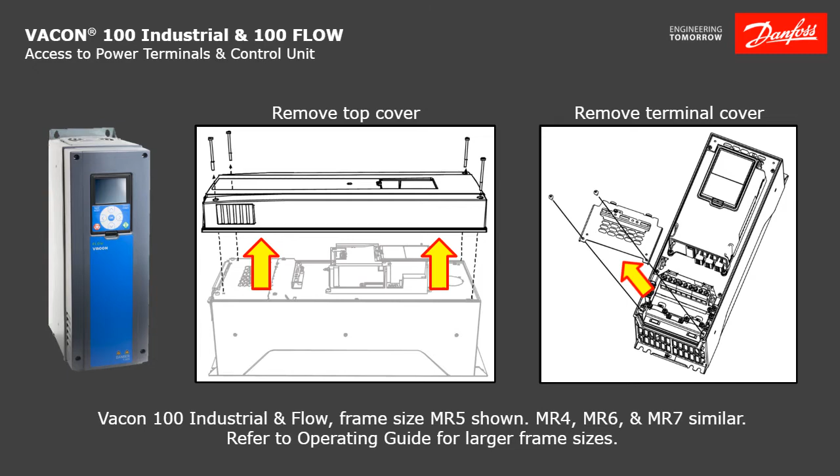To access the control unit on the VACON 100 Industrial and 100 Flow drives, release the 4 screws and remove the top cover. Remove the power terminal cover for access to the mains, motor, brake chopper, and DC bus terminals. The drive shown here is a frame size MR5, but access is similar through frame size MR7. Refer to the Operating Guide for additional information and instructions for larger frame drives. I will discuss accessing these areas on the VACON 100X later in this video.

The drive shown here is a frame size MR5. Drives through frame size MR7 are very similar, and access to the control unit terminals is the same. All VACON 100 Industrial and 100 Flow frame sizes use the same control unit. To reveal the terminals and dip switches, squeeze the tabs on the control box as shown and pull up on the hinged cover. With the control box cover raised, the input-output or I/O and relay terminal blocks are accessible.

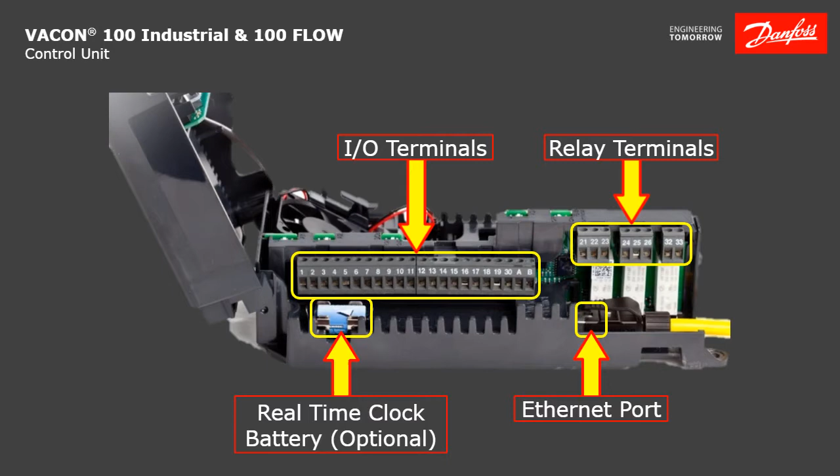In addition to the I/O terminals, the optional battery for the real-time clock is located within this control box, as well as the Ethernet port. There are 5 option card slots on the VACON 100 Industrial and 100 Flow drives. The A and B slots contain the basic I/O and relay terminals, and it's a single card that plugs into both slots.

The most common card in these 2 slots, which is known as the F3 card, has 3 output relays, but there is another option card similar to this one, known as the F4 card, that contains 2 output relays and a thermistor input. The card placed in the A and B slots may vary depending upon the original order specifications.

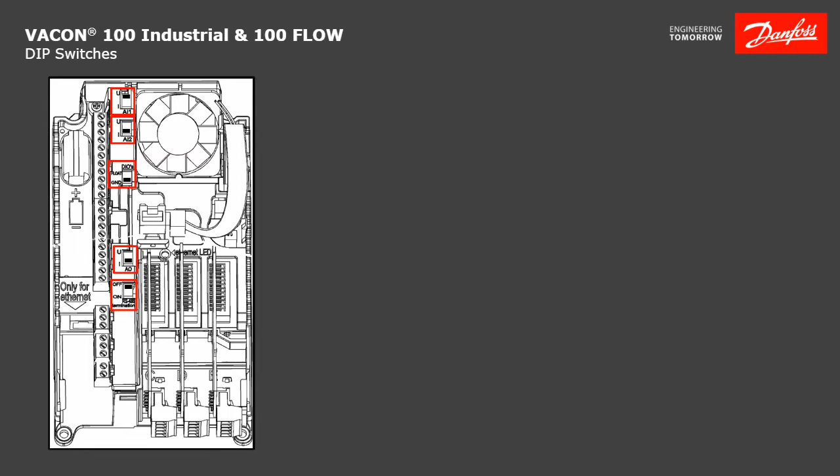There are 5 dip switches to configure the analog and digital inputs and outputs and RS-485 communications. These are located on the top of the standard I/O card plugged into slots A and B of the control unit as shown. Starting at the top, the first 2 dip switches define the analog input 1 and 2 signals for either a voltage or current input. The default for AI1 is in the up or U position, which would be a 0 to 10 volt DC input. The default for AI2 is in the down or I position, which would be a 0 or 4 to 20 milliamp input.

The third dip switch will define the type of digital input polarity to be used in the drive. The default configuration is in the down or GND position. In this position, all of the digital inputs will have a positive logic. This means that applying 24 volts to any of the digital inputs will activate it or turn it on. This is the most common configuration, but if changed to the up or float position, it allows a negative logic for the digital inputs. This means that applying a ground signal to any digital input will activate it or turn it on.

The fourth dip switch defines the analog output signal for either a voltage or current output. The default is in the down or I position, which will be a 0 to 20 milliamp output. If placed in the up or U position, it would have a 0 to 10 volt DC output. The bottom dip switch is used to add a termination resistor when using RS-485 communications. The default position is in the up position, which is off. If needed, the switch can be placed in the down or on position when the termination resistor is required.

The VACON 100 series of drives are built with a standard of 6 digital inputs, 2 analog inputs, 1 analog output, either 3 relay outputs or 2 relay outputs and a thermistor input, an Ethernet communication port, and an RS-485 communications interface. Functionality can be increased by adding an additional option card for I/O or field bus expansion as previously discussed.

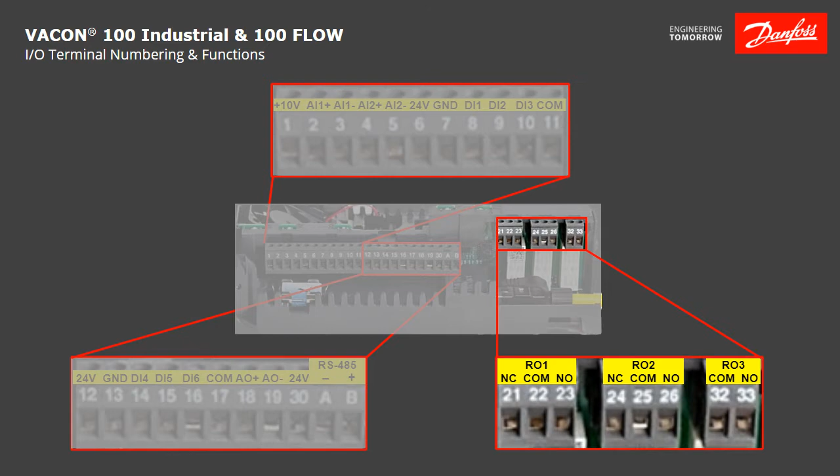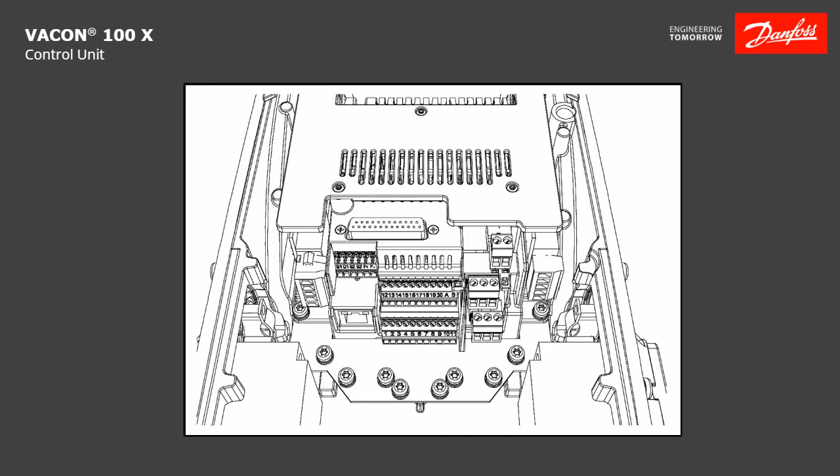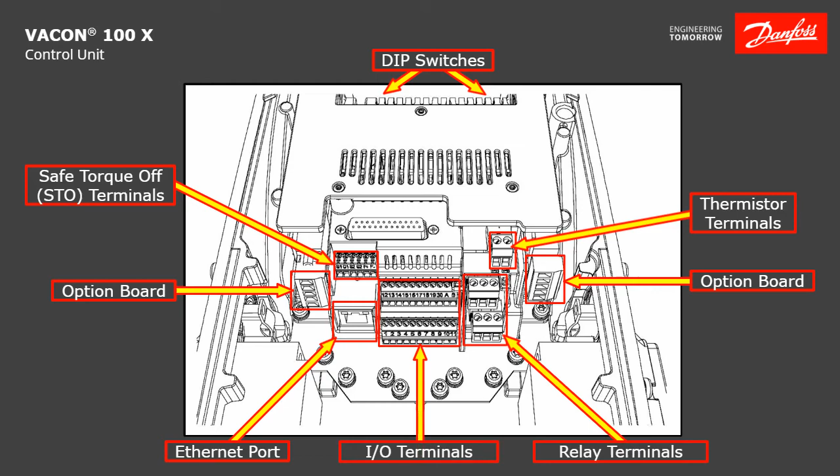Starting in the lower left corner is the Ethernet port. To the left of it is the first of 2 option card slots available on the 100X drives. Above that are the safe torque off terminals, or STO. At the top is the location of the dip switches, which we'll discuss shortly. On the right side we have 2 thermistor input terminals. Below that is the second option card slot. On the bottom right are the 2 standard relay output terminal blocks. Finally, in the bottom center are the I/O terminals and RS-485 field bus communication terminals.

There are 5 dip switches to configure the analog and digital inputs and outputs and RS-485 communications. These are located at the top of the control unit. Starting from the left, the first 2 dip switches define the analog input 1 and 2 signals for either voltage or current input. The default for AI1 is in the down or V position, which would be a 0 to 10 volt DC input. The default for AI2 is in the up or C position, which would be a 0 or 4 to 20 milliamp input.

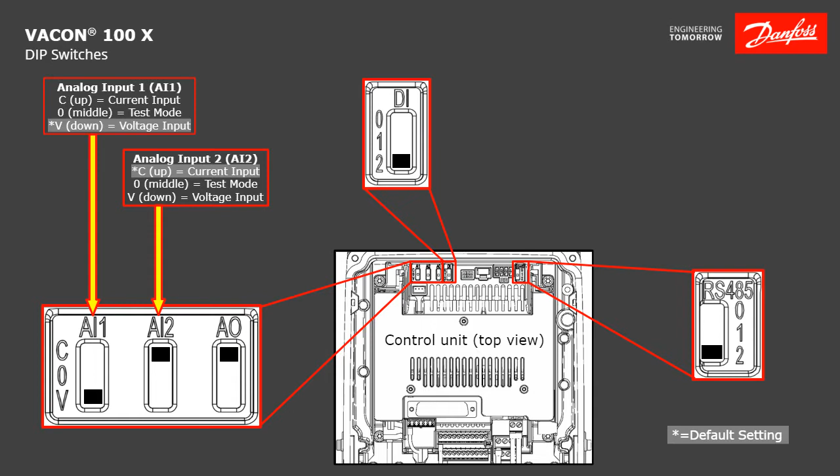The third dip switch defines the analog output signal for either a voltage or current output. The default is in the up or C position, which would be a 0 to 20 milliamp output. If placed in the down or V position, it would have a 0 to 10 volt DC output. Note that analog input 1, analog input 2, and analog output dip switches have a middle or 0 position. This is a factory test mode that should not be selected and may have undesirable results if used.

The fourth dip switch will define the type of digital input polarity to be used in the drive. The default configuration is in the down or 2 position. In this position, all of the digital inputs will have a positive logic. This means that applying 24 volts to any digital input will activate it or turn it on. This is the most common configuration, but if changed to the middle or 1 position, it allows a negative logic for the digital inputs. This means that applying a ground signal to any digital input will activate it or turn it on. The up or 0 position will be used if the digital inputs are to be isolated from ground.

The fifth dip switch is used to add a termination resistor when using RS-485 communications. The default position is in the down or 2 position, which is off. If needed, the switch can be placed in the up or 0 position when the termination resistor is required. The middle or 1 position is used for biasing purposes and connects pull-up and pull-down resistors of 10 kiloohms.

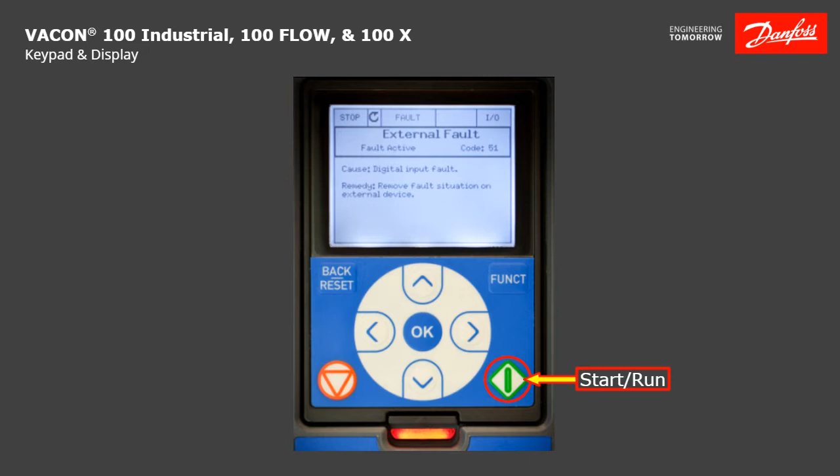Pressing the lower left red button will initiate a motor stop command. The default operation of this button allows it to provide a stop command regardless of the control place, meaning it will stop the motor if being controlled from the keypad, I/O terminals, or field bus. This can be changed to function only in keypad mode from the parameter menu if needed.

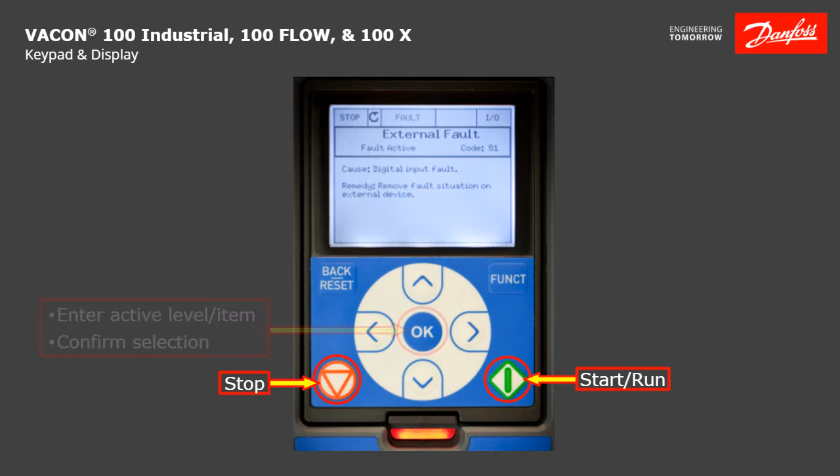The OK button can be used to enter an active menu level or item, or confirm a selection such as when editing a parameter value. The back reset button allows a backward move in the menu, exiting the edit mode, or resetting a fault. The FUNCT or function button is used to access the control page.

The control page can be used to change between the local and remote control places, change the motor rotation direction, or to select the quick edit function that will allow entering a specific parameter or monitoring ID number and directly access that value for editing or viewing.

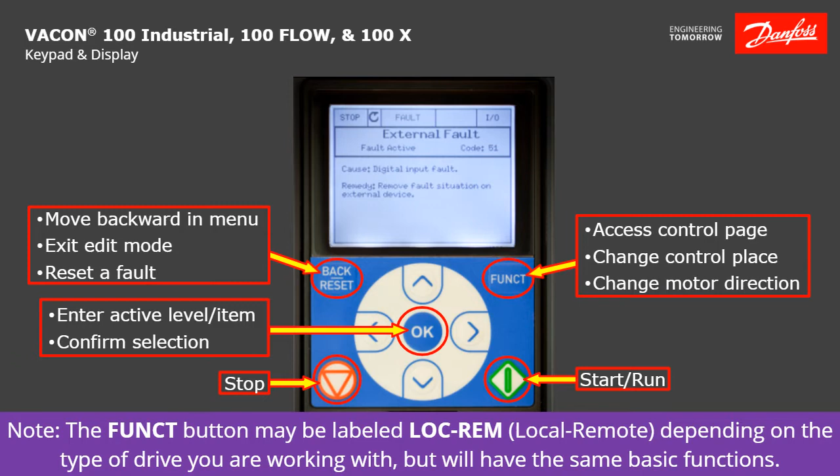The left and right arrows allow moving the cursor left or right when editing a parameter value. This allows editing a specific digit to make programming faster and easier. The up and down arrows allow scrolling up and down through the menu items, or can be used to increase or decrease a value.

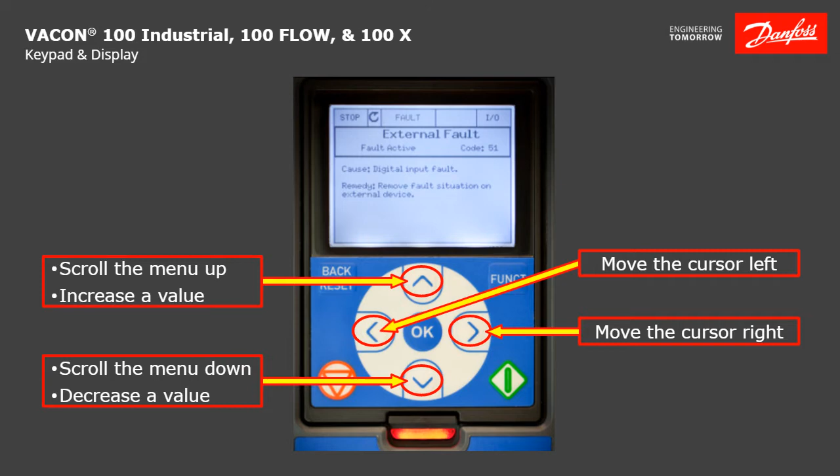The VACON 100 industrial and 100 flow drives contain an LED indicator located directly below the keypad for additional indication of the status of the drive. A slowly blinking green LED indicates that the drive is in a ready state and all conditions have been met for the drive to run. A solid green LED indicates that the drive is currently running, and a quickly blinking green LED indicates that a software update is being processed.

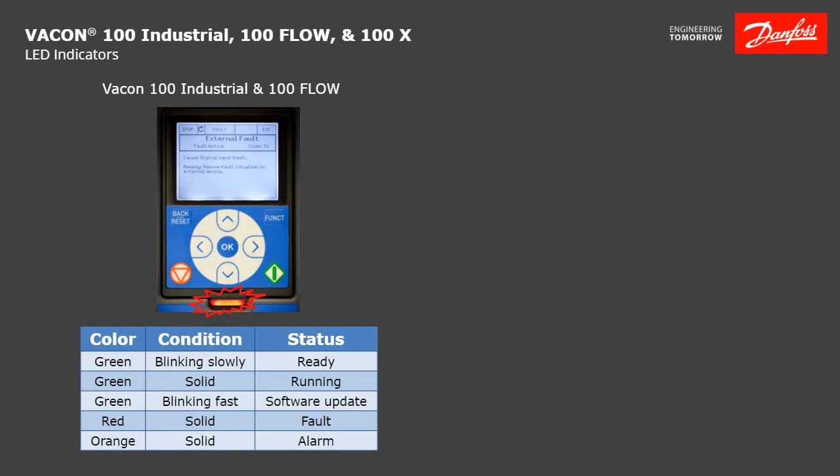A solid red LED indicates that a fault condition has been tripped and the drive is stopped. A solid orange LED indicates that an alarm condition has been met, but the drive is able to continue running until a fault level has been reached.

The VACON 100X contains 4 LED indicators in the lower left corner of the drive. The yellow PWR LED indicates that the drive is powered up. The green Run LED indicates that the drive is currently running. The red FLT LED indicates that a fault condition has been tripped and the drive is stopped. The yellow RDY LED indicates the drive is in a ready state and all conditions have been met for the drive to run.

The LCD display is used to indicate the status of the drive and how it is being controlled, viewing or editing parameter menus and values, and monitoring of various drive input and output values. The graphical display keypad shown here is the most common type of keypad, but there is a text display keypad available. Refer to the appropriate operating guide for detailed information on usage and explanation for the type of display you are using. Operating guides are available at danfossdrives.com. The following information applies to the graphical display keypad shown.

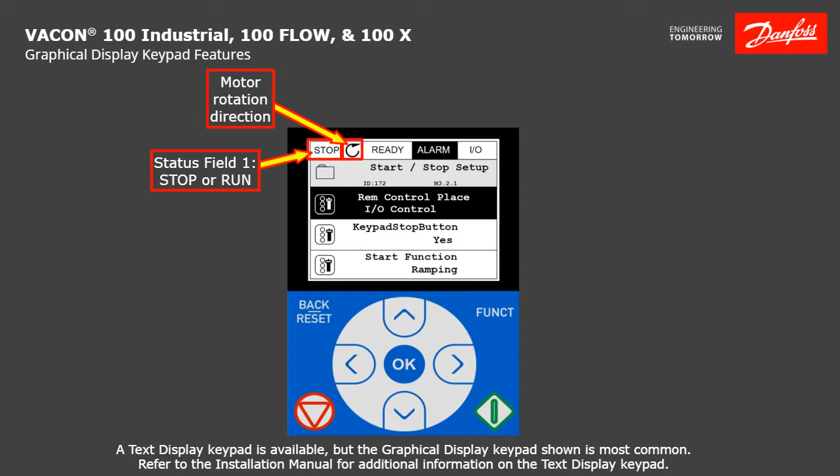Starting from the top left, the first item is status field 1, which indicates if the drive is in a run or stop state. The next block indicates the motor rotation, either clockwise or counterclockwise. The next item is status field 2, which indicates if the drive is ready, not ready, or a fault has been detected. Next is the alarm indicator, which will indicate if an alarm level has been reached.

The top right block indicates where the drive is being controlled. This will show PC if being controlled from a computer, I/O if being controlled remotely from the I/O terminals, keypad if being controlled locally from the keypad, or field bus if being controlled remotely through field bus communications.

The next line down provides text to indicate the menu category level currently being accessed. Below that is the location field. This provides the ID number of the parameter or value and the current location within the menu structure. The fields below that are the groups or items associated with the menu category listed. The dark colored block is the activated group or item.

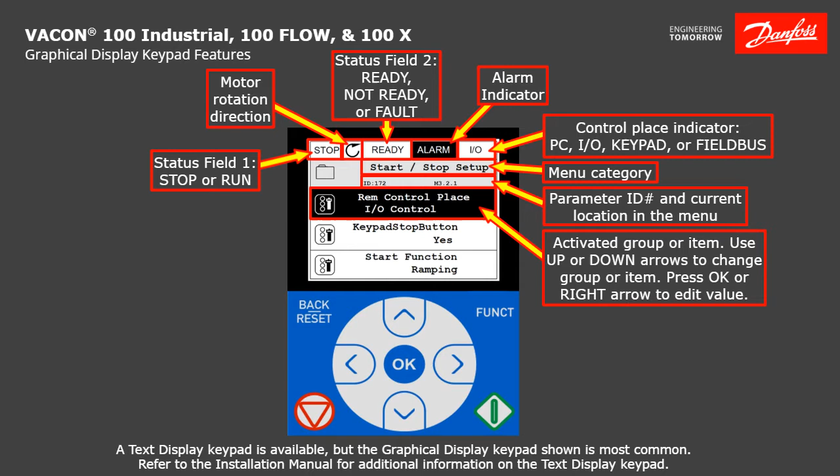Using the up or down arrow buttons will allow scrolling to the desired block. Pressing the OK or using the right arrow will allow viewing or editing the selected item or allow you to continue further into the menu group depending on the current location in the menu structure.

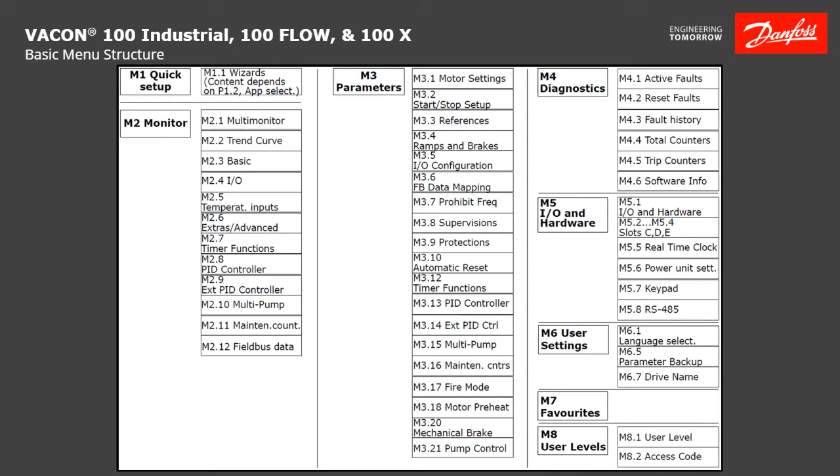Here is the basic menu structure for the VACON 100 series of drives. Note that this menu structure may vary slightly depending on the type of VACON 100 drive you're using, but the majority of this structure applies to the entire VACON 100 series of drives. I will discuss some of the most common basic menu items when I show the operating portion of this video.

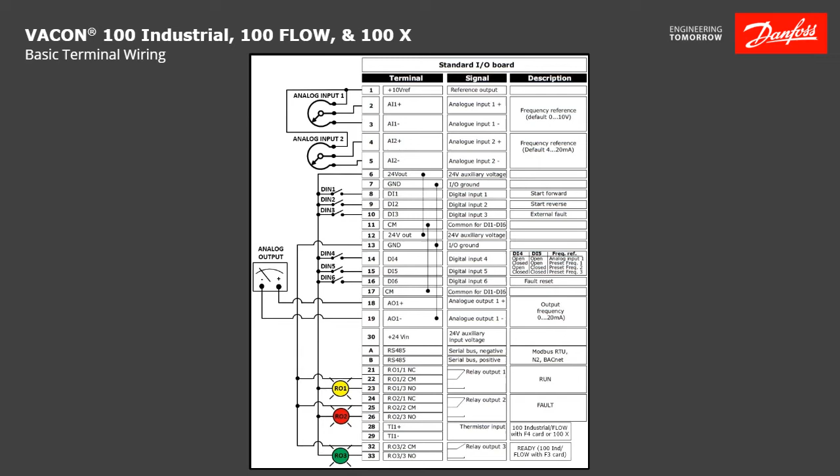Terminal number 18 is the analog output plus, and terminal number 19 is the analog output common, which is internally connected to ground, both of which are connected to a meter for indicating the output frequency. Terminal numbers 23, 26, and 33 are the normally open relay contacts for RO1, 2, and 3, with the default functions also listed. Now I'm going to perform a demonstration on an actual drive here.

So I've powered up the drive, and when I powered it up, it came up to this main menu, and from the main menu we have access to all of the other parameters and values that we can either edit or view. What I want to do is bring this drive back to factory default settings. So to do that on this drive, from the main menu, I'm going to scroll down using the up and down arrows until we get to user settings.

One of the features with this drive is there's a number in parentheses underneath the item. It tells you how many menu items are within that level. If I hit OK, we come up to the user settings menu, and we've got a number of different items within that menu. And in this case, I want to go to parameter backup. If I hit OK, the first item that's on here is restore factory defaults.

If I hit OK, we can activate it. There's a help menu there. There's also an add to favorites item. If I want to go down and see what restoring factory defaults means, I can hit OK, and it says restores factory default settings. It also will restart the drive if the motor is not running.

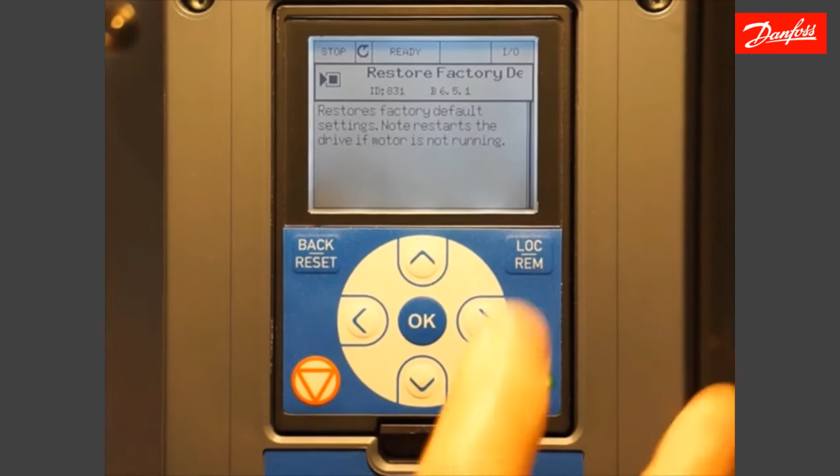OK, we go back and we're back to restore factory defaults. Hit OK again. Here I hit activate. Now all the parameters are being reset back to factory defaults. When this finally powers back up, the menu will be at a quick startup level, and we can change some of the various information right here at the beginning. This is also the screen that you should see if you're setting up a new drive.

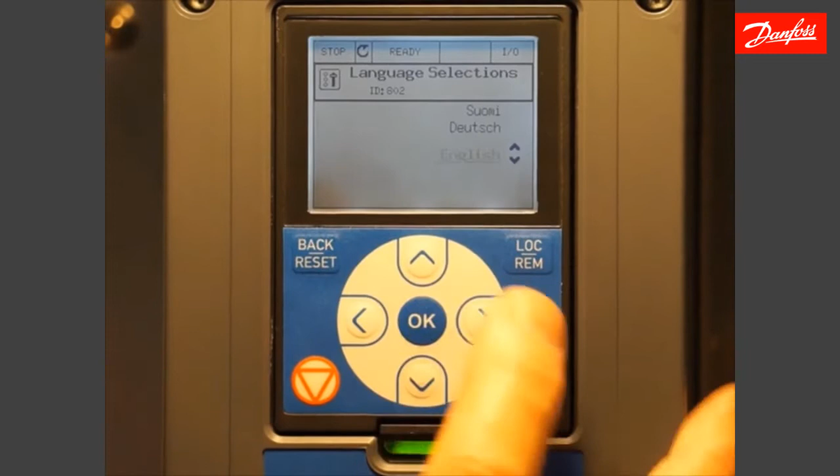So the first item here is our language selection. I'm going to choose English. If this had a battery for the real time clock, which this one does not, then it would ask for items such as the date, the time, daylight savings, those types of things. The next thing after that is the startup wizard. I'm going to say yes to the startup wizard.

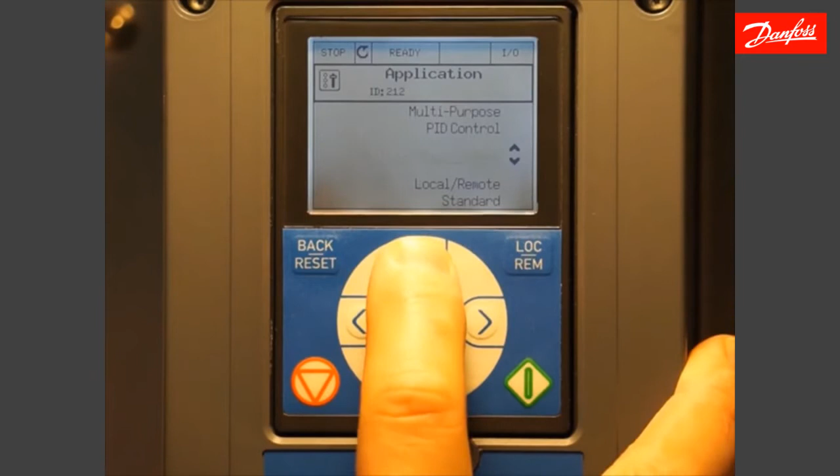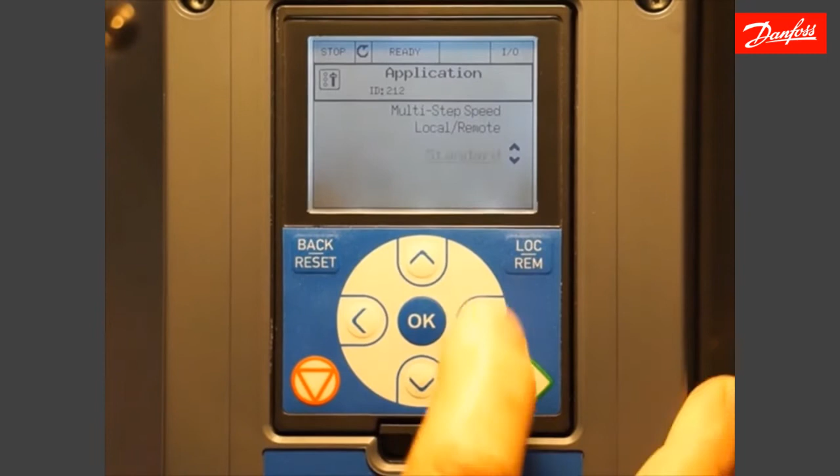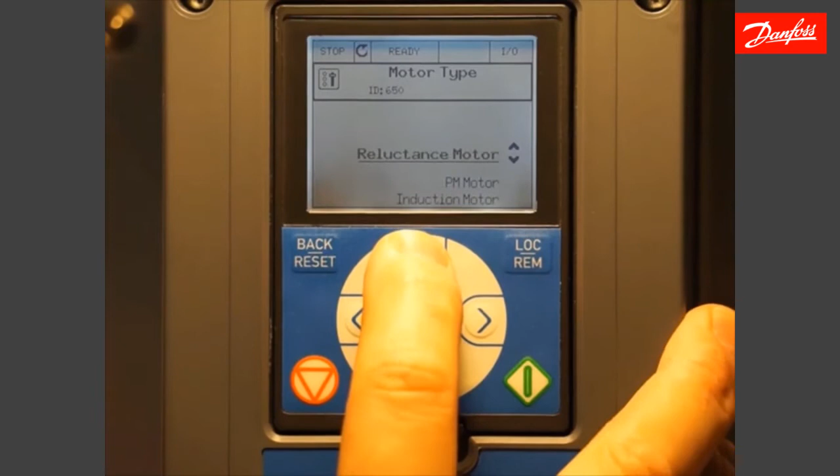And here we can choose which application we want to load into this drive. So we have a choice of standard, local remote, multi-step speed, PID control, multi-purpose, or motor potentiometer applications. I'm going to go with the standard application. So I hit OK. The next question is, what type of motor do you have? Is it an induction motor, permanent magnet, reluctance motor? The one I have hooked up is an induction motor, so I hit OK.

The next thing it asks for is the motor nominal voltage. This would be off of the motor nameplate. So in this case, it is a 230 volt motor. What is your nominal frequency based on the nameplate setting? It is 60 Hertz. What is my motor nominal speed? I'm going to change that to the motor nameplate setting, which in this case is 1600 RPM.

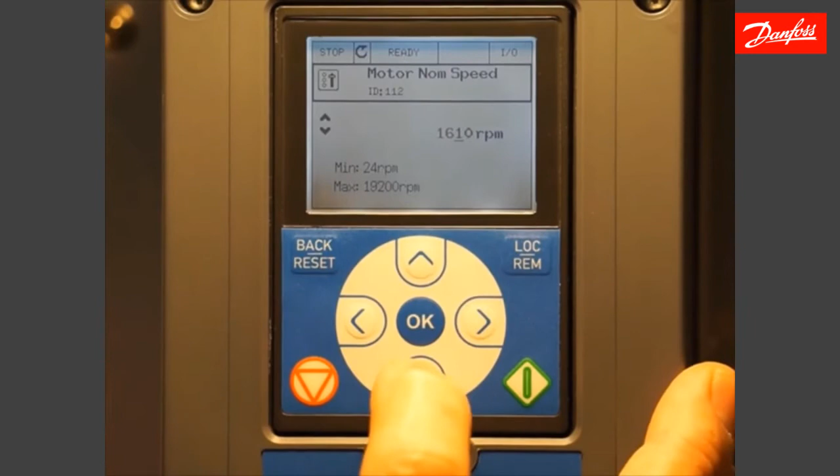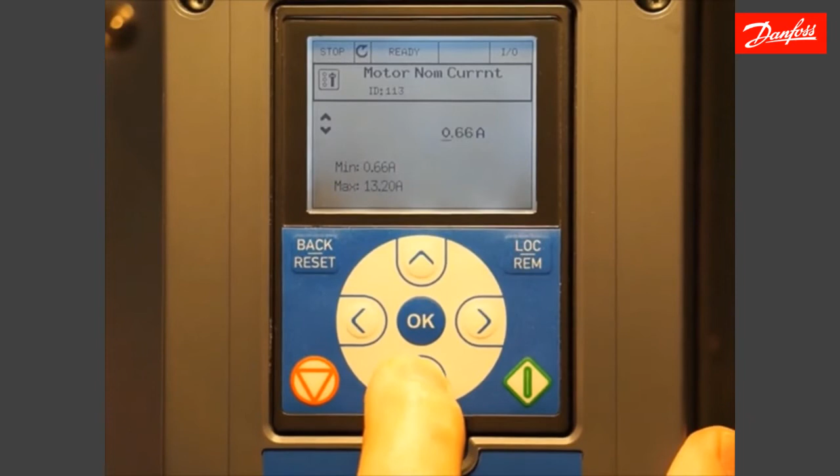And you see I can use the left and the right arrows to select specific digits. If I hit OK, I go on to the next one. My motor nominal current, in this case it's a very low current motor, so I'm going to bring this down to the minimum level. The minimum for this drive is 0.66 amps. I hit OK. Motor cosine of phi, again off of the motor nameplate. 0.80 is OK for this motor.

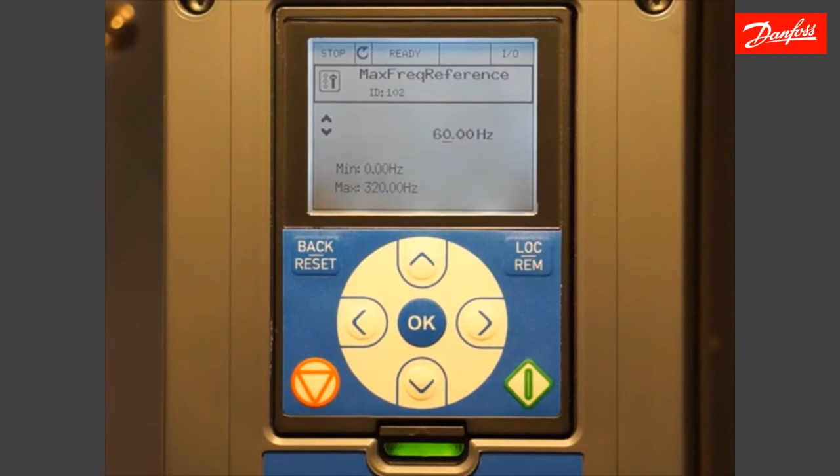Now what is my minimum reference speed? What is the minimum speed that I want this motor to run at? And I'm going to leave it at 0 Hertz. My maximum reference defaults to 60 Hertz. I can set that higher than 60 Hertz. I can set it lower than 60 Hertz. I'm going to change this to 62 Hertz.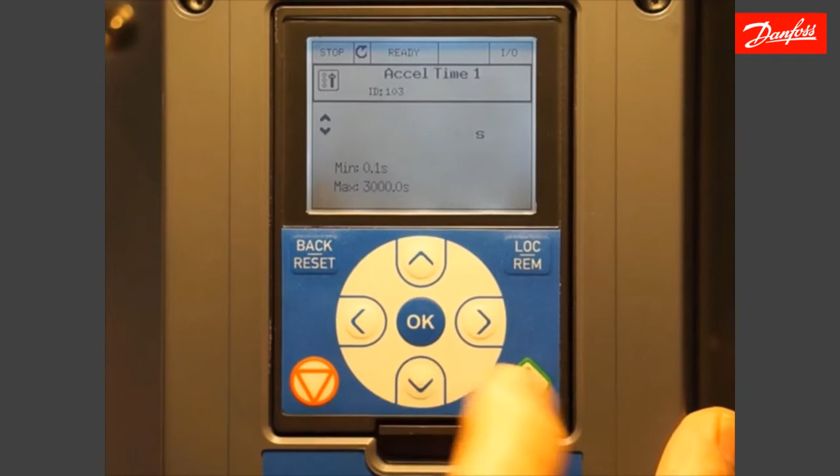Okay. Acceleration time. How fast do you want this to get up to full speed? In this case, I'm going to say 3 seconds. My deceleration time, the time it takes to get from full speed to 0 speed, I'm going to say 3 seconds again.

Application wizard. So again, we're going to go into that. The next question is for selecting from where the start-stop commands and frequency reference is given. Hit OK. And do I want the I/O terminal, field bus, or keypad? In this case, I do want to go with the I/O terminals. Hit OK.

So the message given in I/O terminal control: frequency reference can be given either by AI1, 0 to 10 volts, or AI2, 4 to 20 milliamps. I actually have analog input 2 set as a 0 to 10 volt reference as well. I can scroll down to the next message if there is another message. So this just says press OK to continue or back to cancel.

The next thing that comes up tells you what the current configuration is that you've selected. So analog input 1, which is on terminals 2 and 3, is set for frequency reference. Analog input 2, terminals 4 and 5, frequency reference.

Digital input 1 on terminal 8 starts forward. Digital input 2 is starting in the reverse direction. Digital input 3 will provide an external fault. Again, that's when 24 volts is applied to any one of those terminals. I see I have a scroll bar over here, so I can scroll down.

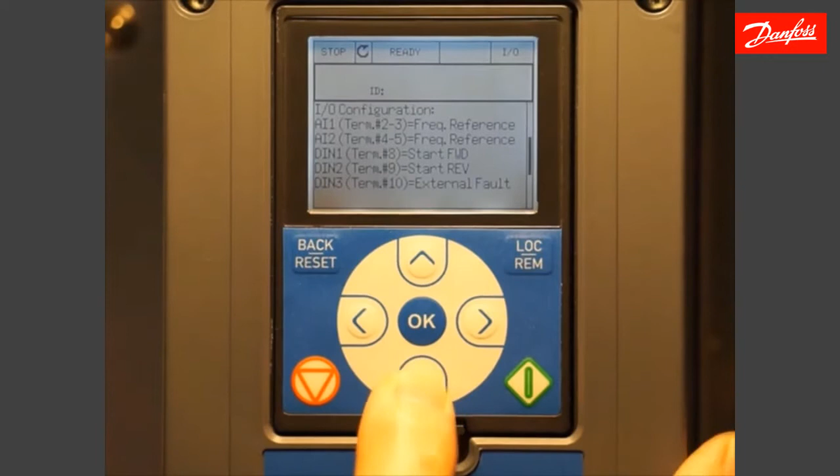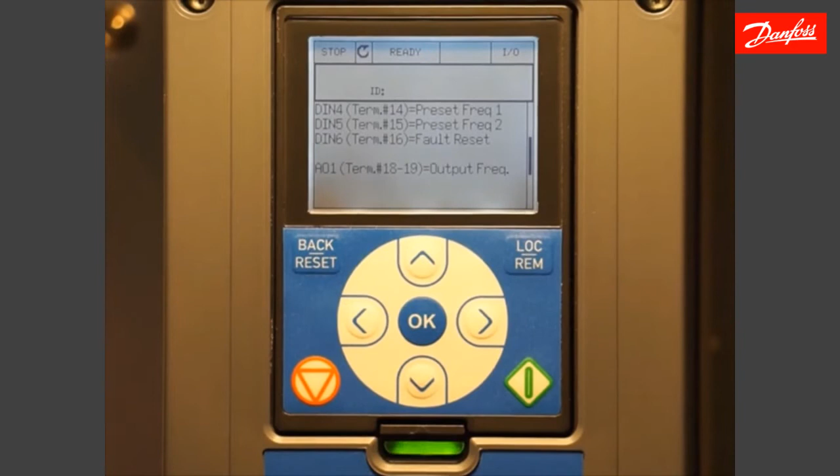We see that digital input 4 on terminal 14 is set for preset frequency 1. Digital input 5 is set for preset frequency 2. And digital input 6 is set for fault reset. Again, these are all digital inputs that are freely programmable for other functions. I'm going to be presenting just the factory default functions.

Also, analog output 1 is set for output frequency. So I have a meter on my I/O simulator with a gauge on it that will show me a proportional reference of the actual output speed. I can scroll down again, and then we'll have our relays, how they're programmed.

So when relay 1 is enabled, it tells you that it's in a run state. Relay 2 is in a fault state, and relay 3 would be in a ready state. Press OK to continue or back to cancel. So I'm going to hit OK. Wizard is ready. Press OK to exit.

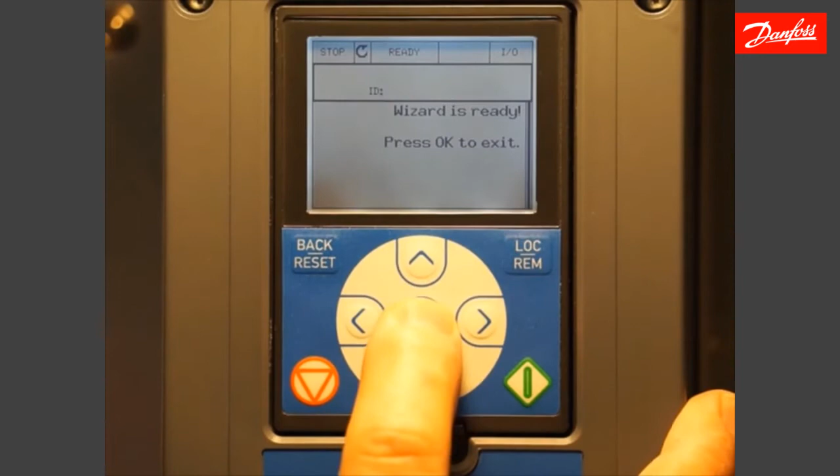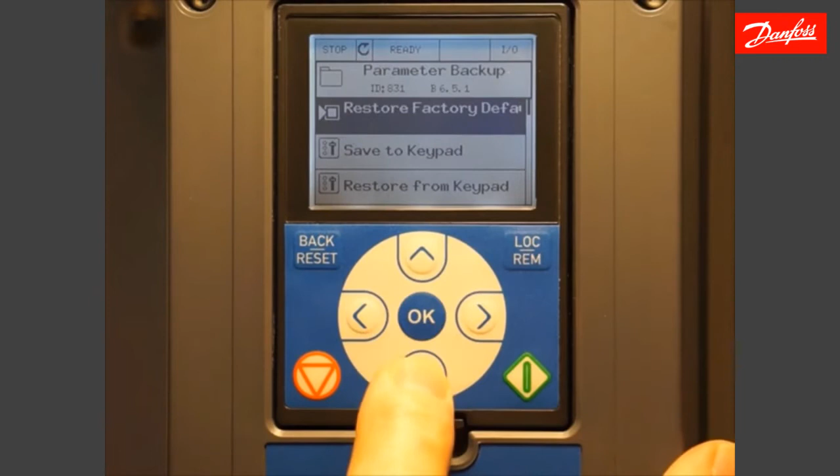Now that we have our basic setup input, the next thing I want to do is save all of these parameters to the keypad. So we're going to go back to the same menu, which was the user settings, parameter backup. We can save it to the keypad, restore it from the keypad. We have 2 sets that we can save it into. We can save it to set 1 or restore from set 1. We can save it to set 2 or restore from set 2.

In this case, I'm just going to save it to the keypad. OK. Again, help if you need some information. Save parameter values to keypad to copy them to another drive. So that's an easy way to save your parameters so that you can input them to various other drives if you'd like to. Hit OK. Save to keypad.

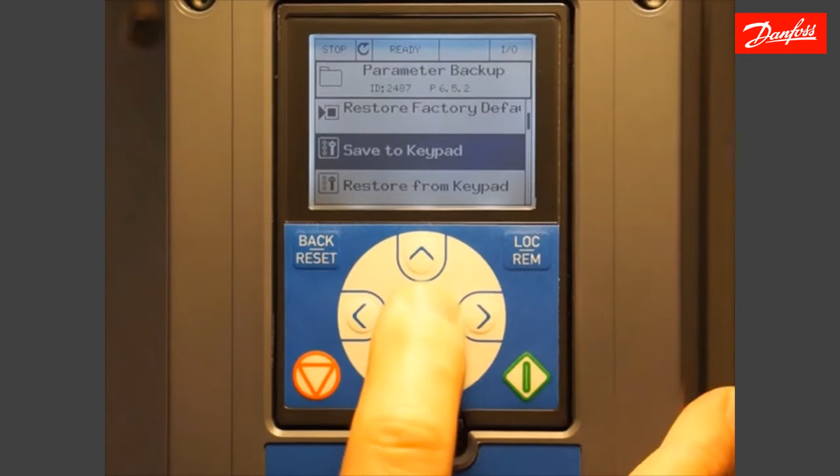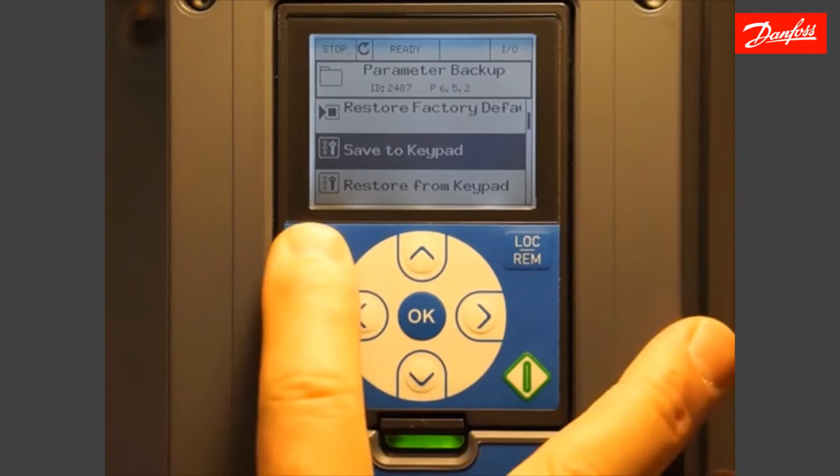Parameters have been saved. Press OK to continue, and we're finished with backing up the parameters to the keypad. So I just hit the back until we get back to the top level of the main menu. Now I want to run this in keypad mode. So right now it shows that we are in I/O mode.

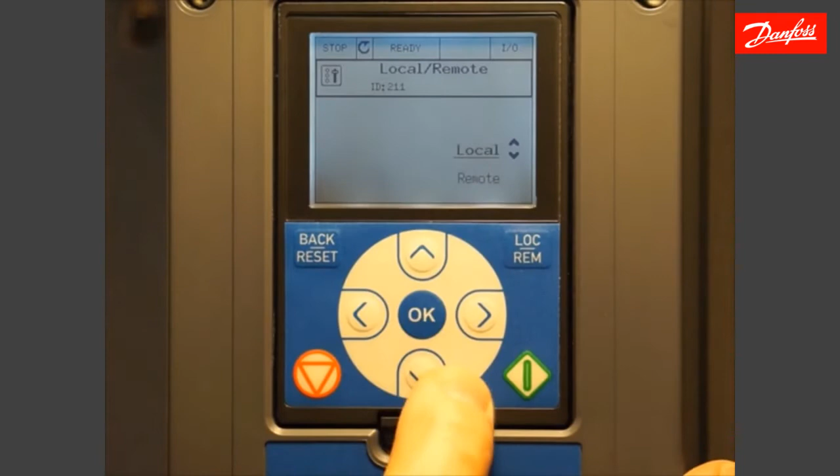In order to change that to keypad mode, I just hit the local remote button and scroll down to the local remote item, hit OK, and here we can decide, do we want it in local or remote, and I want to go local, which would be keypad. And now it brings up the monitor screen here, shows us we're in keypad mode.

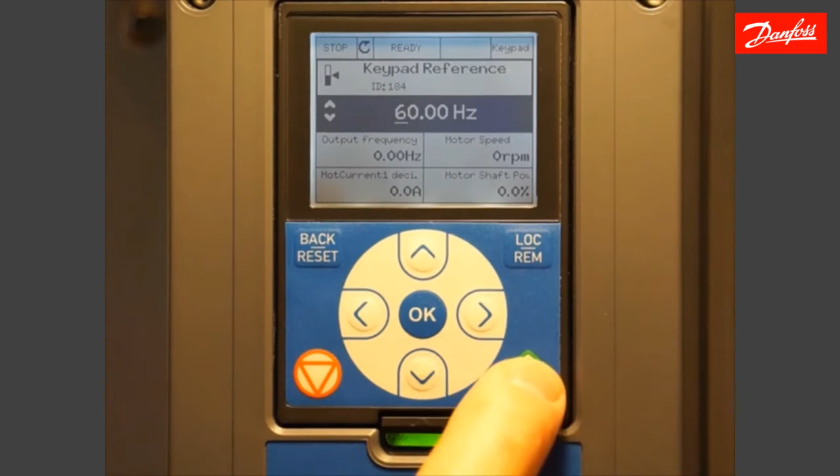Here I can change my keypad reference, hit OK, and I can bring that up to whatever speed I would like it to run at. In this case, I'll say it's 60 Hertz. I hit OK. When I hit the green button, this motor will take 3 seconds, and it should ramp up to full speed of what I have set. We see that output frequency says 60 Hertz.

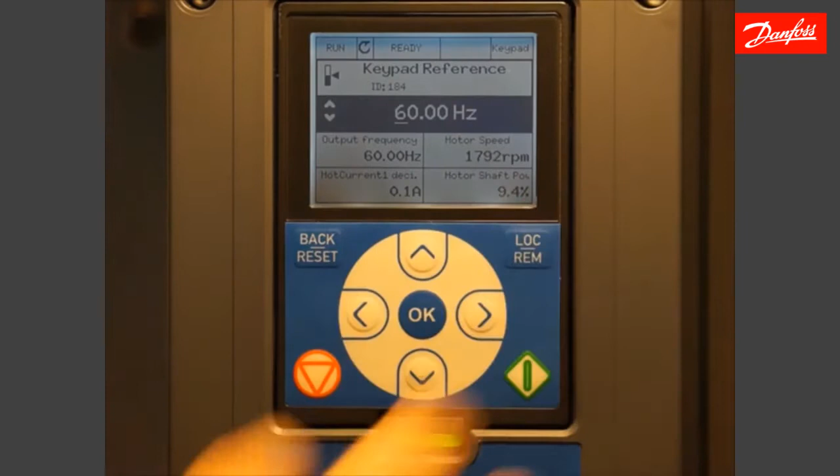My motor speed, approximately 1780 RPM. Motor current, shaft power. These are all editable fields. You can display what you'd like there. That screen is available here when you hit the local remote and go to control page. That's the screen you would see.

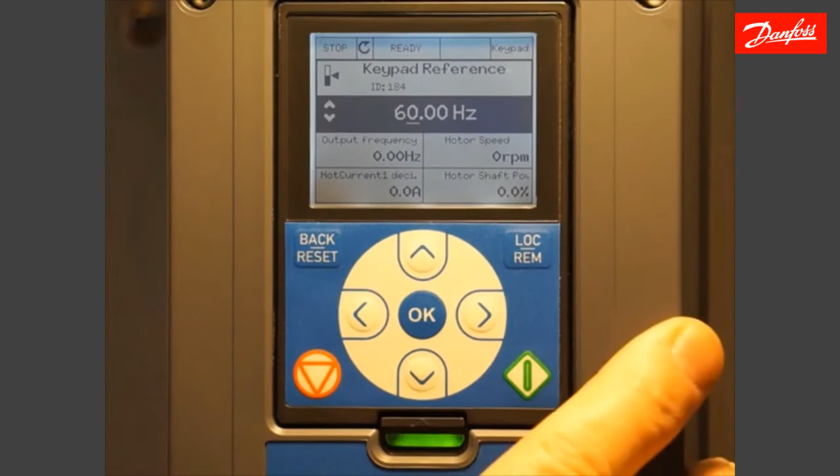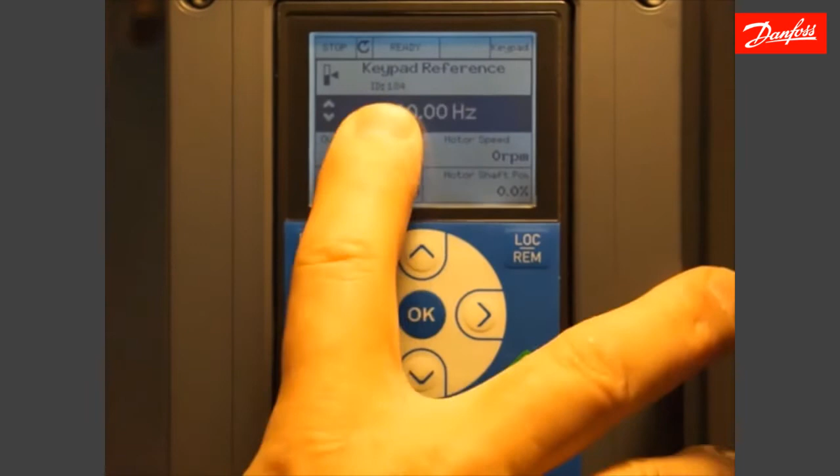I can hit stop, and this will stop the motor. We see that there's no output frequency, speed, or anything else listed here. Again, up here we show stop, we show what the motor rotation was. It is in a ready state right now, running on keypad. We're in keypad reference, which is this ID number 184.

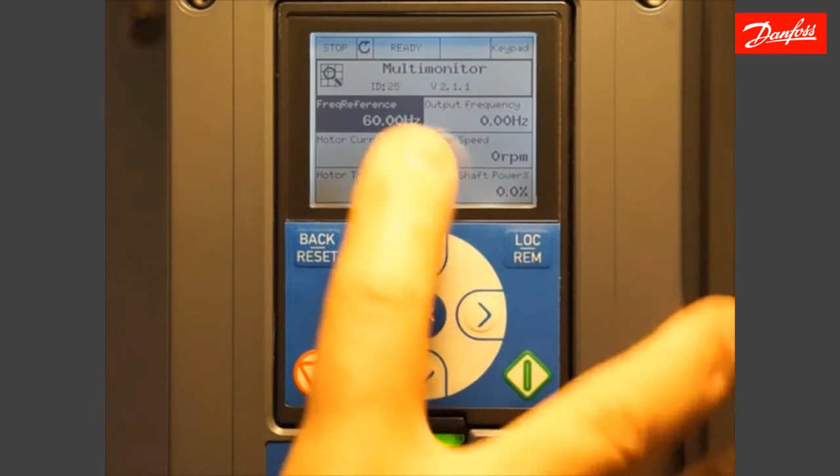We can also go into the monitor mode, which is the next item down. The multi-monitor is very similar to that control page. This also lists a number of different items, all editable for whatever particular item you want to display on that screen. I hit run again. We see the same basic information.

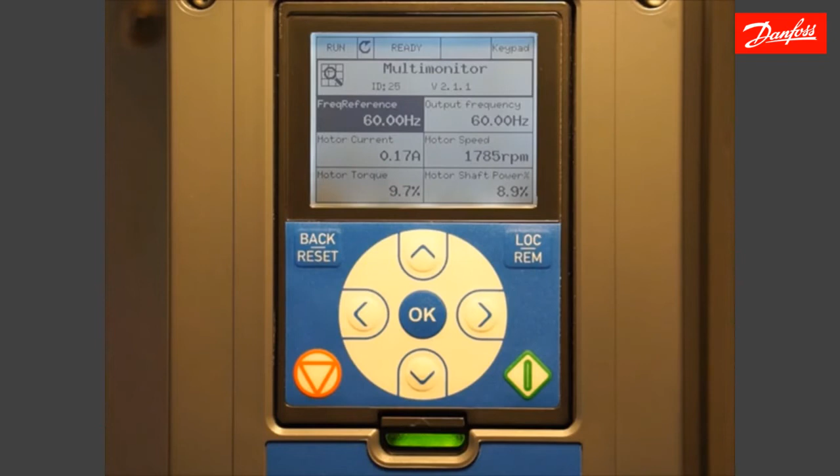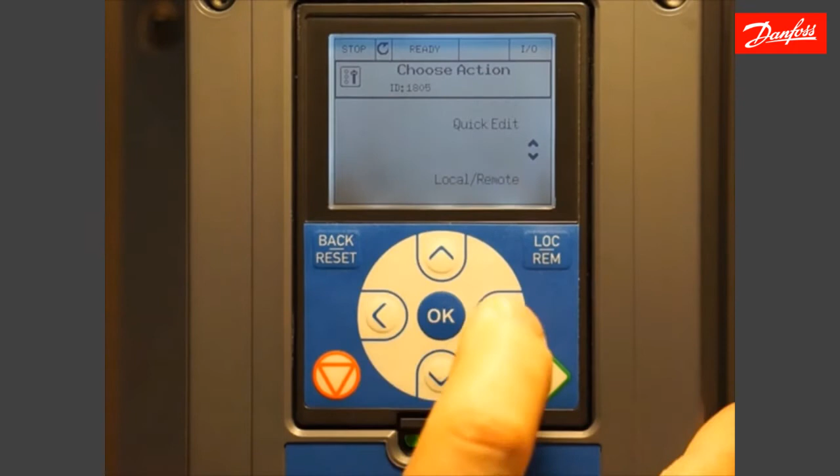Now I want to run this using the I/O terminals. So the first thing I'm going to do here is go back to the local remote and change this from local to remote. And right now it shows that I'm on the I/O terminal strip. And I can also go to that same control page, and we can see the information displayed here based on the I/O, the analog inputs.

So right now I'm bringing these analog inputs the whole way down to 0. If I bring up analog input 1, we can see that there is a change in the frequency reference. Bring that back down to 0. Do the same thing with analog input 2. And we see that it also responds as a frequency reference.

So the drive is not running at this point, but I turn digital input 1 on. Now it shows that it is running. We have a 0 frequency reference, so the motor is not spinning. But if I bring one of the analog inputs up, we can see that it is now running. And I'll bring that up to full speed. We see our output frequency. This was our reference. This is what it's actually running at. There's our RPMs, our current, and shaft power.

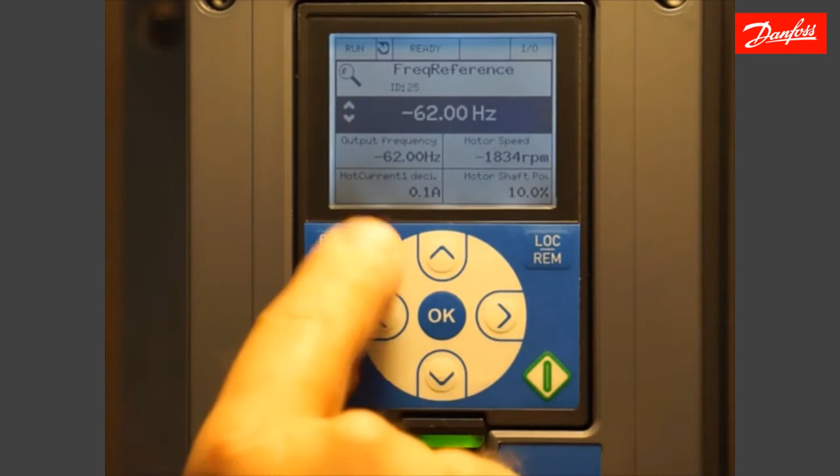I'm going to bring that back down. Turn digital input 1 off. And I'm going to turn digital input 2 on. Digital input 2 is a reverse, and we'll see that it shows a negative reference. So we're running in reverse with a reference of negative 62 Hertz. Output frequency is negative 62. Motor speed is a negative value. And again, same values for our current and shaft power.

I turn digital input 2 off. Turn digital input 1 back on. So right now I have a frequency reference of about 35 Hertz. If I turn digital input 4 on, digital input 4 is a preset reference. The default value is 10 Hertz. I turn that off and turn digital input 5 on. Digital input 5 is a preset speed reference of 15 Hertz. And when I turn 4 and 5 on, we have a preset reference of 20 Hertz. If I turn those back off, we're back to being controlled by the analog inputs.

I can create a fault, external fault in this case. We can see that the keypad display is flashing. We have a fault listed here. We also have a red LED showing here. So I'm going to turn digital input 3 off. Hasn't cleared yet, but I can use digital input 6 as fault reset. And once I do that, we're back to a ready state.

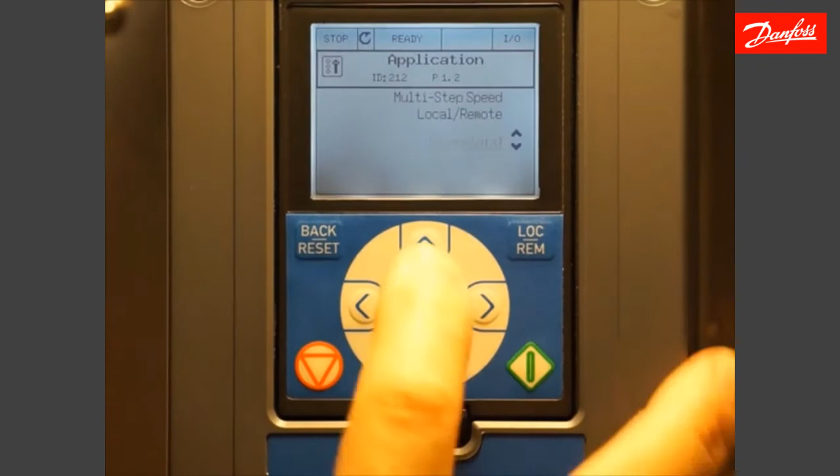A number of these items will be things that we have already set during that startup wizard, such as the application, but it could be changed here. We can change that to whatever, and we have the same options to pick from. I'm going to keep it as standard. There's our minimum frequency reference. We had selected 0 Hertz. Our maximum frequency reference, we had selected 62 Hertz. The acceleration and deceleration time, we had selected 3 seconds.

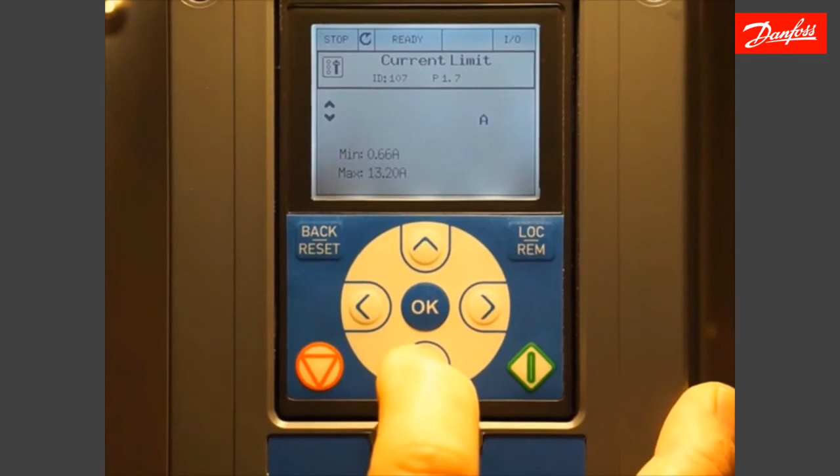Current limit is a new parameter we haven't done yet, and we can go into that if we wanted to change that to something other than 8 amps, which is a default level. In this case, I'm going to change this to 1 amp. Click OK to accept it, and then back. And now you see that the value has been changed. Next item down is the motor type, and we had selected induction motor during that startup wizard. I'm going to leave it as that.

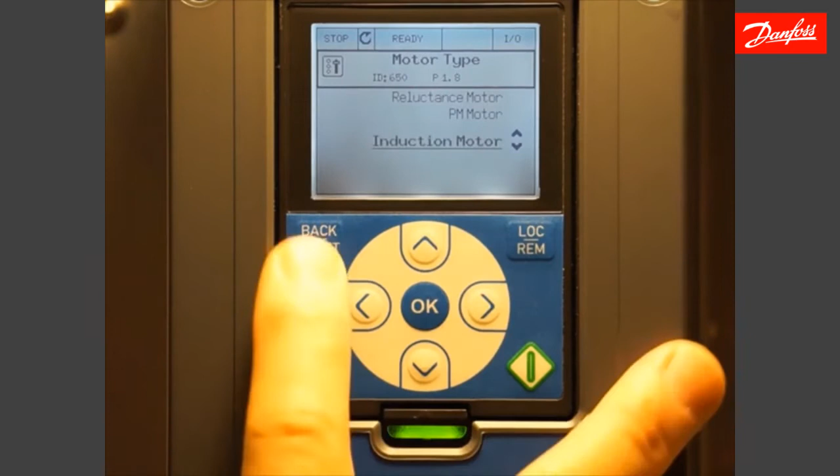The next items will be from the motor nameplate. So we have motor nominal voltage, 230 volts, motor nominal frequency, 60 Hertz, motor nominal speed of 1600 RPM, motor nominal current 0.66 amps, motor cosine of phi 0.80. Energy optimization is disabled. If you wanted to enable that function, you can do that right here.

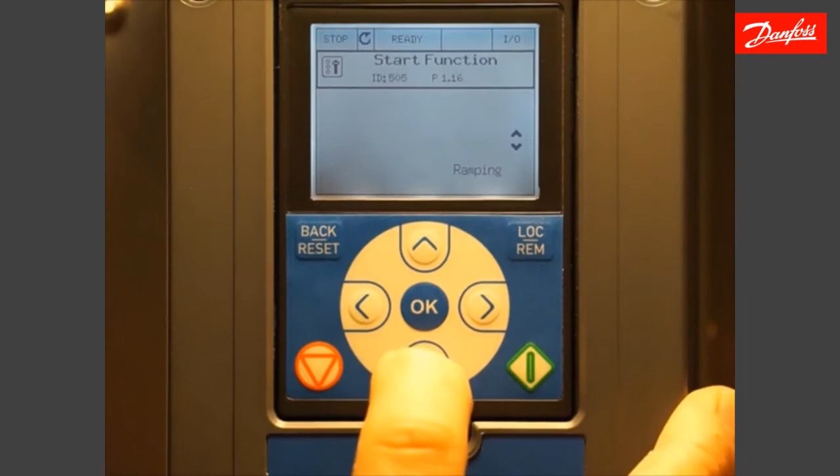Motor identification. The motor identification will fine-tune the drive to match the connected motor and cabling. It provides the drive with a more accurate motor model than just entering the standard data in the parameters. Start function, we can select from ramping or flying start. I'm going to leave it as ramping. Flying start would allow you to start the drive in a motor that is already rotating.

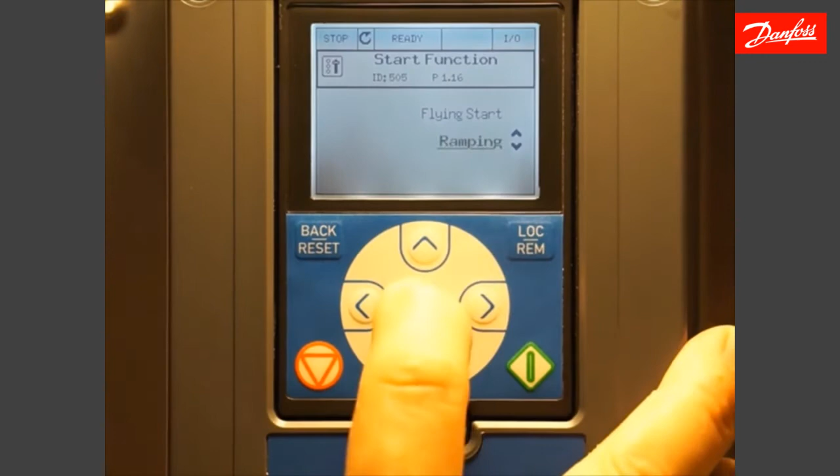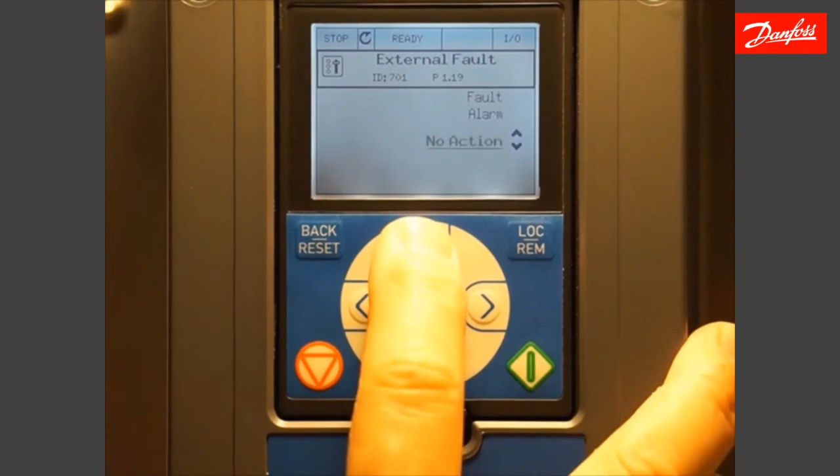Stop function, either coasting or ramping. Coasting is the default, but we could change that to a ramping stop if we wanted. Automatic reset, we can enable or disable, and from defaults this is a disabled feature. External fault, we can decide how we want to deal with an external fault. Default is it faults the drive and it stops it from running. Or we could select fault and coast instead of a ramp. We can give an alarm, or we could do no action. I'm going to leave it as a fault.

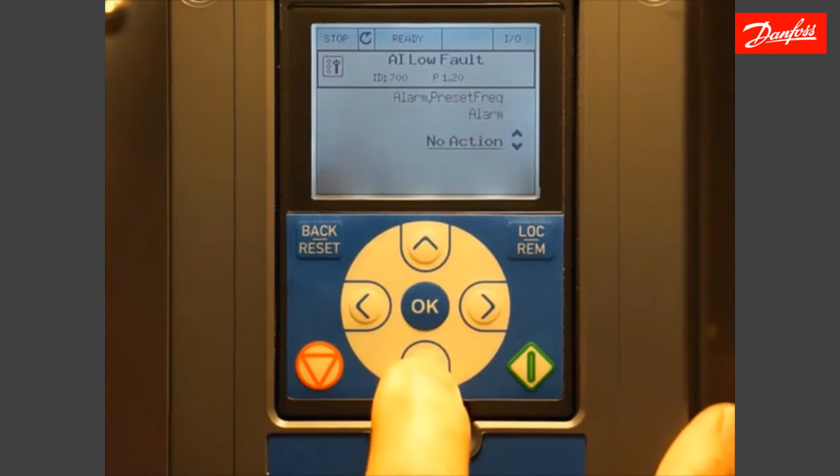Analog input low fault. If there is a fault in the analog input, what would you like the drive to do? And if you're not sure, again, we have this help. Use this parameter to select the response of the drive to an analog input low fault. And we see that we have no action, alarm, alarm preset frequency, alarm previous frequency, fault, fault coast.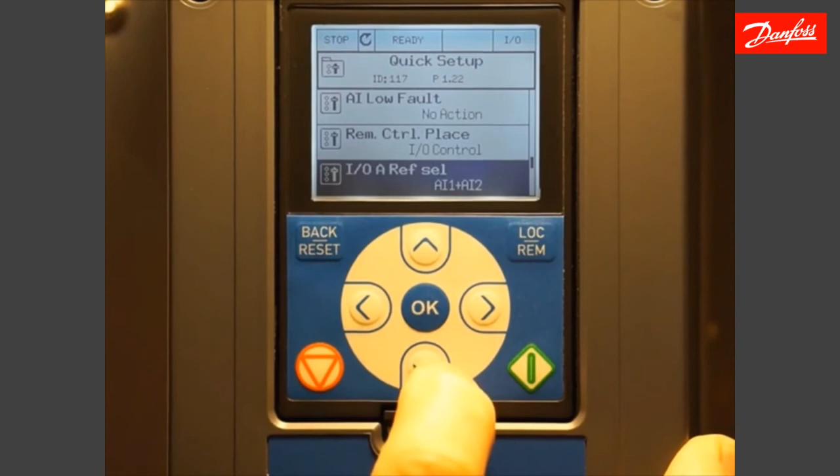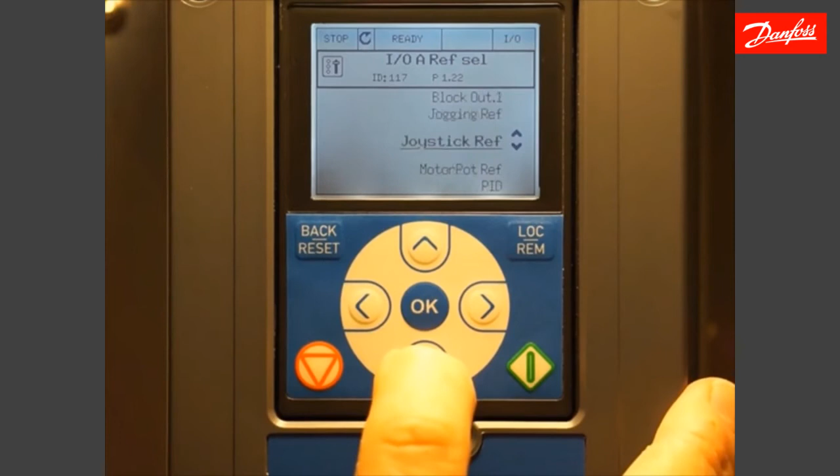The remote control place, which we had set during the startup wizard for I/O control. Reference for the I/O is analog inputs 1 and 2. That can be changed. There are a number of selections here we can select from. I'll leave it as analog input 1 and 2 together. Keypad reference select, I'm going to keep it as keypad reference. Field bus reference select, leave it as field bus.

Analog input 1 signal range. We can change that from a 0 to 10 volt or 0 to 20 milliamp to a 2 to 10 volt or 4 to 20 milliamp if we'd like. Same with analog input 2 signal range. Relay output 1 function. Right now it's set up as a run for defaults. Relay output 2 fault. Relay output 3 ready. Analog output 1 function is for output frequency.

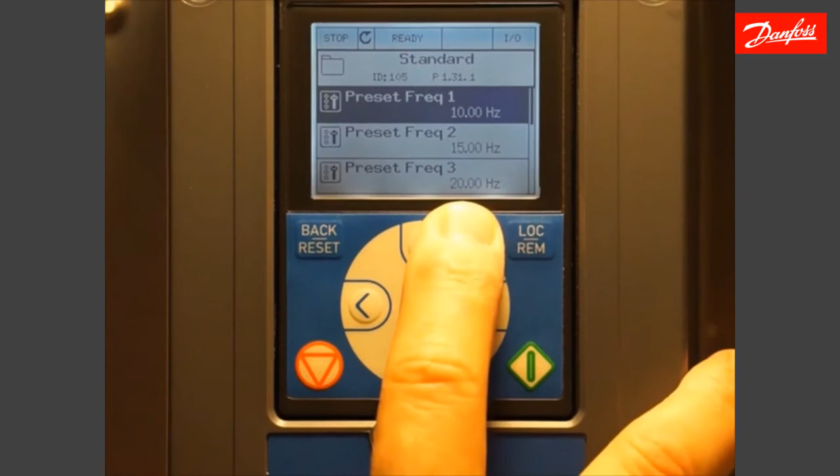Standard, this gives you the ability to change your preset frequency reference levels. So as we see, we have 10 Hertz, 15 Hertz, and 20 Hertz for frequencies 1, 2, and 3, which is when we enabled digital inputs 4 and 5. And then we're back to the beginning again.

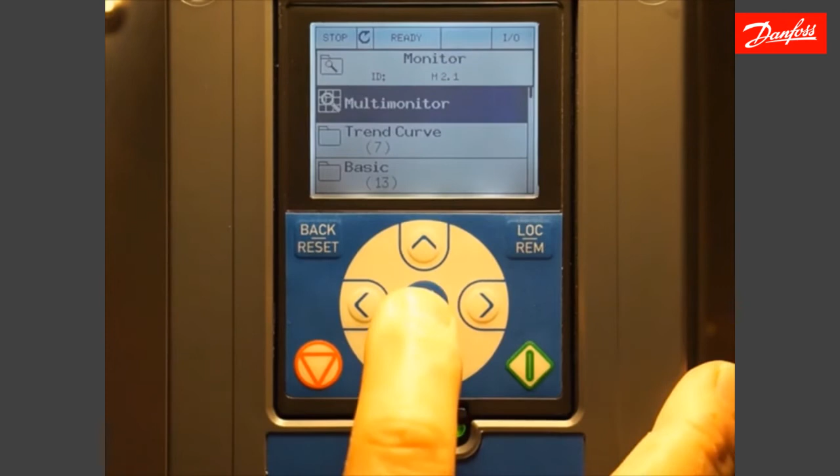Now I'm going to discuss the monitor menu. Next item down, we see there are 11 values in there. There's the multi-monitor we looked at before, very similar to the control page. If I run this drive, we can see all of the various information associated with running this particular motor. We have a trend curve. We can go into that and we can monitor two separate signals in graphical representation.

Basic gives you monitoring of various inputs and outputs on this. So if I enable this, we see our output frequency, what our reference is, current, torque, power, motor voltage, our DC link voltage, temperature, lots of monitoring information there. Some of the other items, again, refer to your manual. There are just too many to go into in this video.

Now I'll discuss the parameter menu briefly. We go into the parameter menu, and I'm not going to go into all of these menus here. We see we've got specific parameter groupings for various functions in the drive.

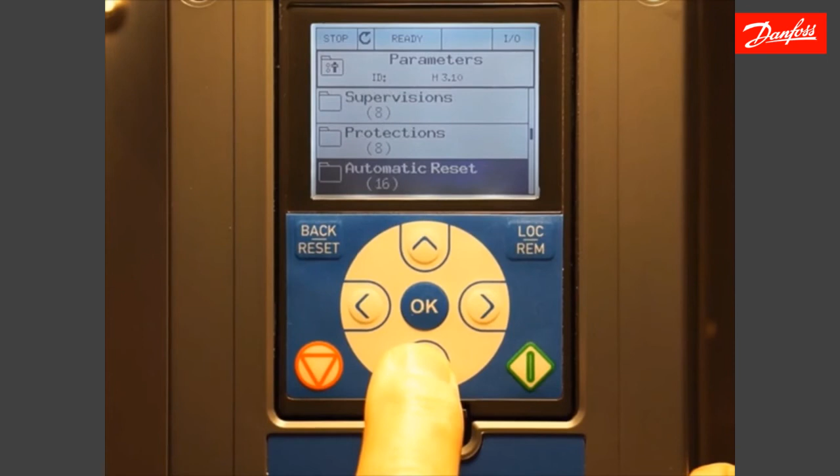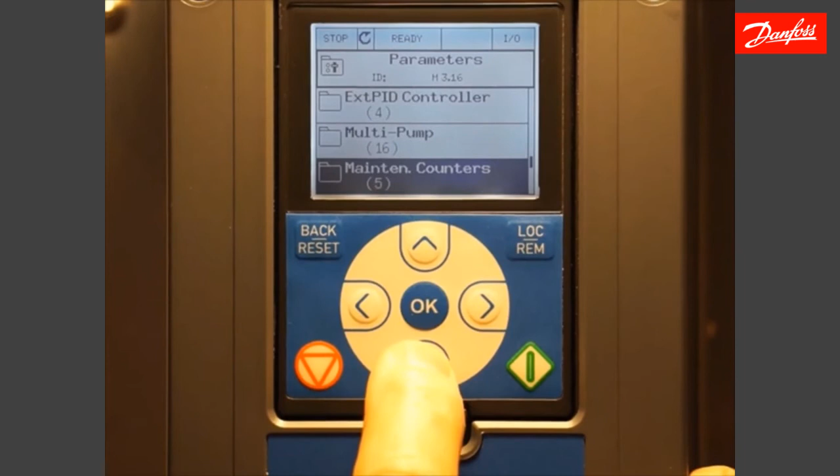So we have motor settings, start-stop setup, references, ramps and brakes, I/O config, fieldbus data map, prohibit frequencies, supervisions, protections, automatic reset, application settings, timer functions, PID controller, external PID controller, multi-pump, maintenance counters, fire mode, motor preheat, drive customizer, mechanical brake, pump control, and advanced harmonic filter. And then we're back up to the top again.

The next menu I want to talk about is the diagnostics menu. Here we see we can get into faults, looking at the fault history or active faults. There are some counters in there, information about the software and the drive. So active faults, just that. So anything that is currently an active fault in the drive. As it is right now, there are no active faults, so the folder is empty.

The next item down is resetting faults. So just like we did with the back reset button, you could do the same thing here. Fault history. The memory is capable of holding up to 40 faults, and you can scroll up or down to get to the fault that you want to look at. When you click OK, you'll see the details of that fault, and here we can get some information about that fault. So we know that the code was a 51, the ID number was a 1051.

That's good information if you need to call into tech support for help in resolving a problem that you're having with a fault. This could help them identify where the fault is coming from. Also information on date and time that it occurred. So if this had a real-time clock battery in it and you had set the time and date, this would record when that actually occurred. The operating time that it happened,

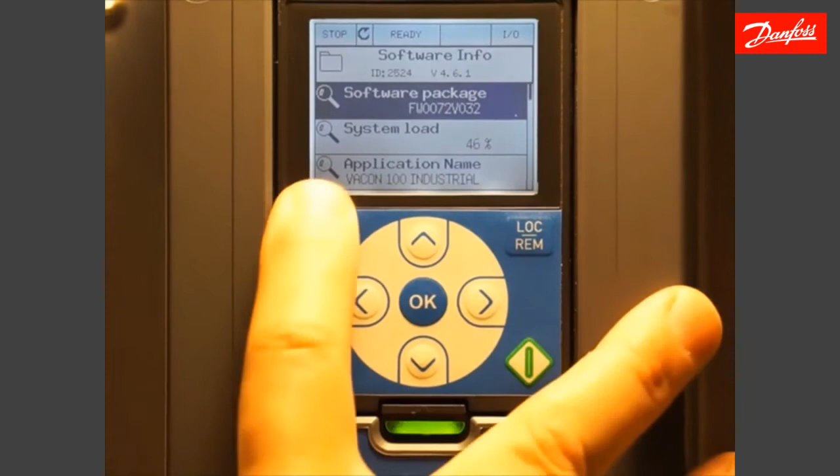The next item, trip counters. Next item, software information. Information specific to the software that's installed on this. So we can see that this is VACON 100 industrial software. It gives you the software package number. Drive information gives you voltage and current, what the drive was built as. Unit status. So a number of items within that diagnostics menu that may be very helpful.

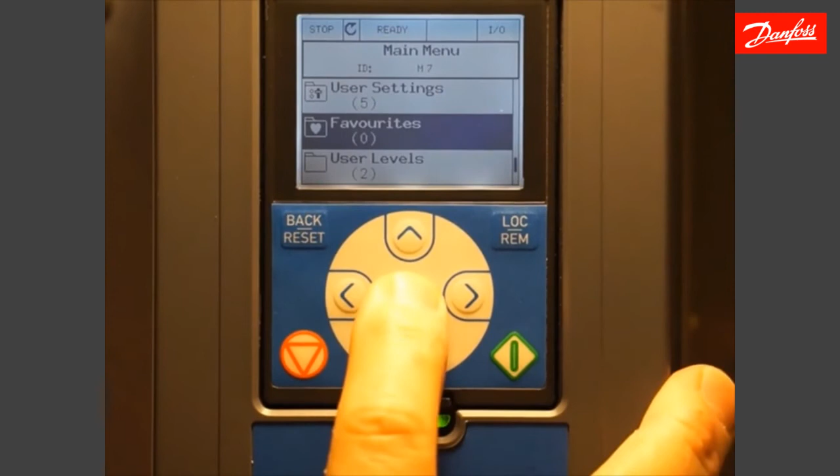The last item I want to talk about is the favorites menu. The favorites menu is a place where you can store some of your frequently accessed items, whether it's a parameter or a value. As it is right now, the folder is empty because we haven't added anything, but we can add any parameter value or a monitored value into this. So I'm going to go into the quick setup, and I'm going to add my maximum frequency reference. It says it was added to the favorites.

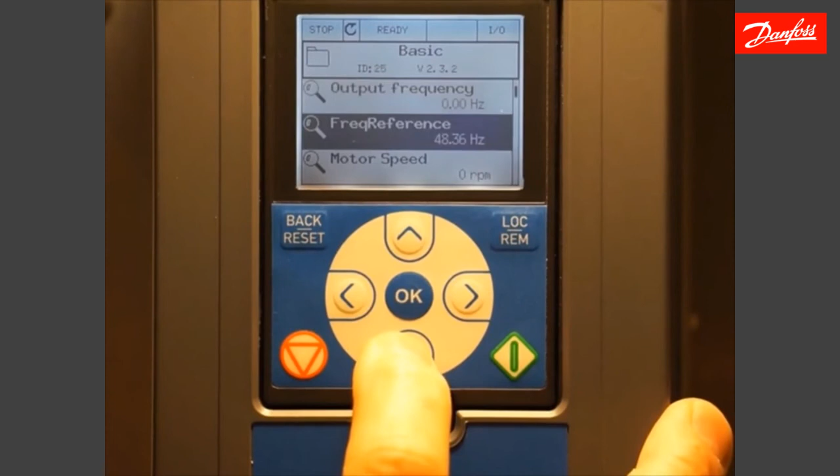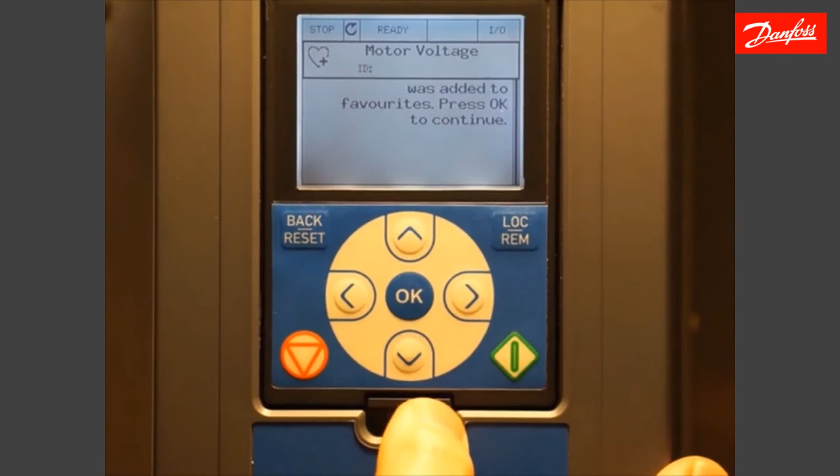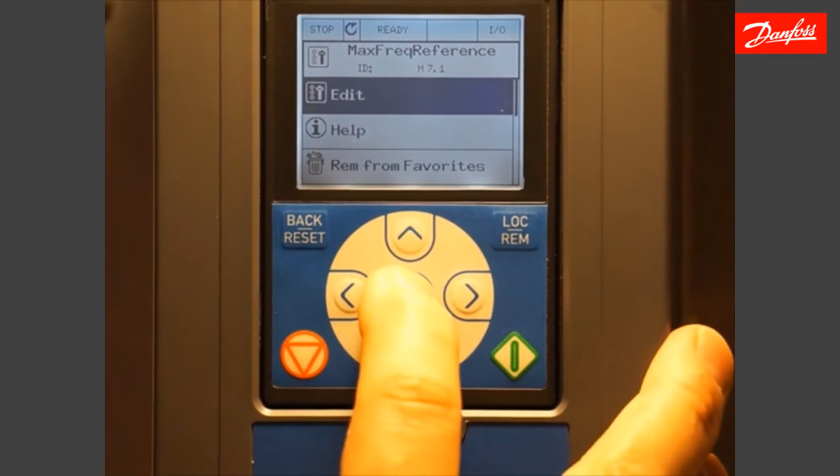I'm going to add a monitored value. I'll say motor speed, and I'll say motor voltage. So now that I've added as many of these parameters or monitored values as I want to put into the favorites menu, they always will be able to be viewed or edited from this favorites menu. So we can see those three items have been added in here. If I want to go in and edit one of them, I can go in and edit it just like I could any other value within one of the other menus.

So that's it for the VACON 100 basic setup video.